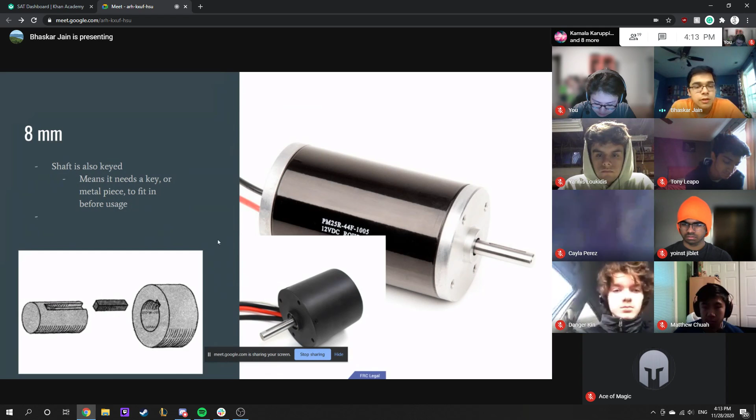So when we change output geometry, there's several things that we can change it to. What we usually use, and what you guys have used in your designs, is going to be 1/2 inch Thunderhex. So this is just a Vex website. If you guys are ever bored, you can scroll these websites too. So this is hex shaft. It's called hex because it's hexagonal. In the real world they don't use this that much, but it's very common in FRC.

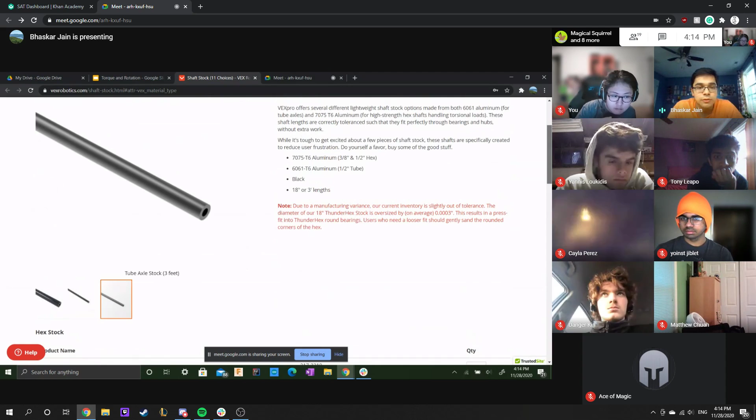Then there's round shaft. As its name implies, it's literally just a circle. The difference between 1/2 inch and 3/8 inch hex is just the diameter from tip to tip. You will not see 3/8 inch generally in FRC. In other robot competitions you might, but you'll generally see 1/2 inch. What we use here is Thunderhex, which is Vex's own special product. Unlike normal hex, which is a perfect hexagon, Thunderhex has these rounded edges. So you can use Thunderhex for both circular bearings and hex bearings. So actually, let's just show you guys.

Did your computer randomly just switch to like Yahoo, like the Bing search engine? I think you just have Bing as your search engine, Bhaskar. No, I don't though. I always change it. I think it's because of the safe search. Yeah, I think that might be it, but I thought I turned that off. Like, I'm 17 years old now.

I'm too cool. Anyways, so yeah, this is a circular bearing, and then we have a hex bearing. Just the differences for different shafts. So the cool thing about Thunderhex is because it has these rounded edges, it can work in both hex and circular. So we generally use Thunderhex, and the other benefit from using Thunderhex is that it has this hollow center. So that means we can thread it. Threading is a concept we'll go over a little later, but that's just one of the benefits.

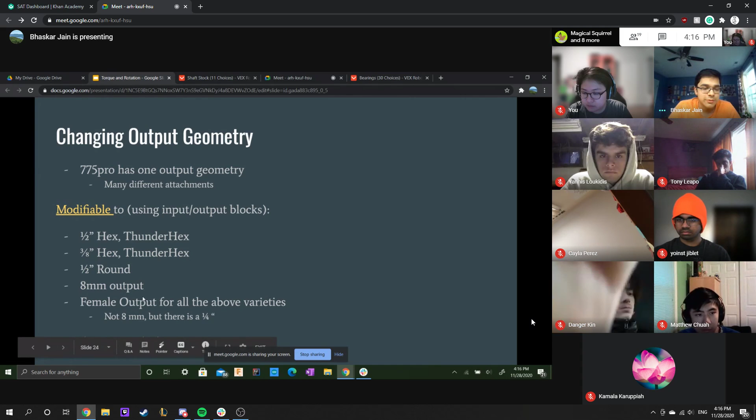So in addition to changing the torque and angular speed, these gearboxes are also really good for changing output geometry. Because like I said, these 8mm shafts aren't super useful on their own when everything else is like half-inch hex or something like that. Oh yeah, and for all the variations that I showed you, there's a female output shaft. This is basically the male version you could call it. There's just a female version for it, and we use those pretty frequently too.

So any questions or thoughts about output geometry? Those are the different types that are FRC legal. In general, we will be sticking to 1/2 inch Thunderhex. How do the female and the other types of shafts interact with each other? Why is there a separate female shaft?

So if this is the male output shaft, let's say I have a shaft that's 1/2 inch Thunderhex, and I want to connect it to a motor. I would put a female end attached to the motor so that the shaft couples with the female end. So you're just inserting the shaft into the female output part. Does that make sense? Okay, yeah, I think I get it.

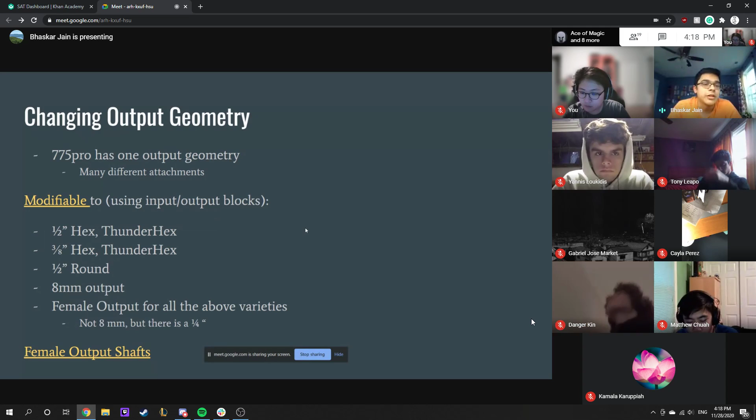Yeah. So any other questions about that? This is pretty important because up until now we've just been saying motor to a shaft, but this doesn't just connect to the shaft by itself. It has a little bit of engineering to it. So now we're going to talk a little bit about how VP works.

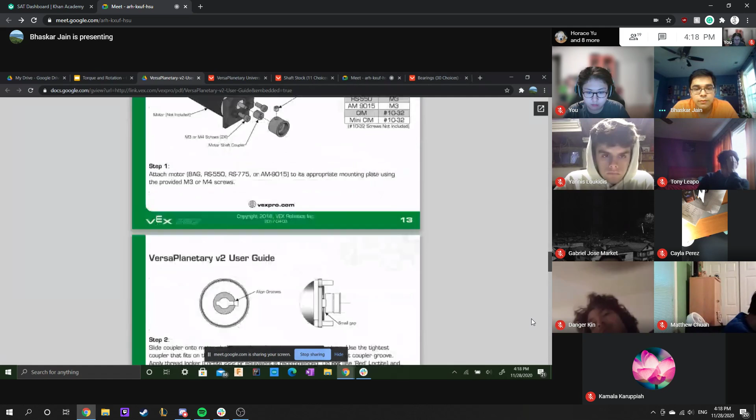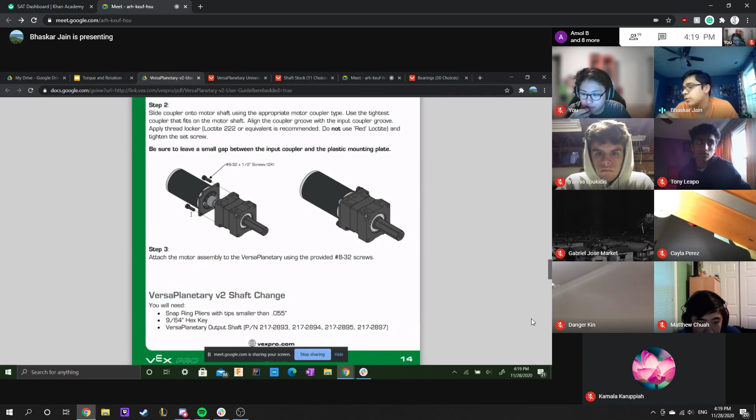Okay. So this is an example of a male output shaft. This looks like 1/2 inch Thunderhex. This is what it would look like attached to the gearbox. This would be another example of 1/2 inch Thunderhex. So the way a VP works, the way you attach it to a motor, the first step is you need this mounting plate. So let's say I have this VP.

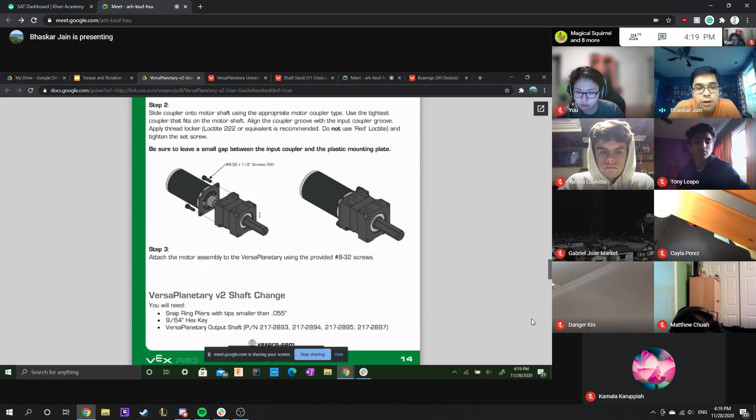The first step is to attach a mounting plate to it, which I have right here. You attach that via screws, and that mounting plate allows you to attach the rest of the gearbox to it. So the first stage over here, a better picture of it, this is the one that couples this 8mm shaft to the rest of the gearbox. This is called the base stage. It's pretty big and hefty.

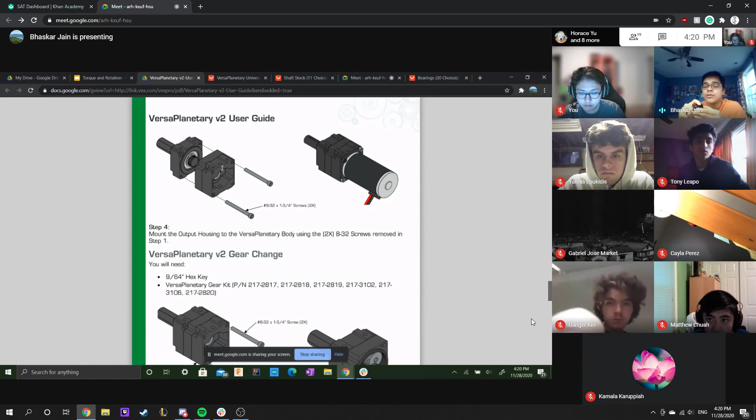So you take your motor, your motor mounting plate, and you attach it to your base stage, and then on the base stage everything else gets attached. So in this example above, you see that it has one reduction stage. You can have up to 3. 3 in general is your stopping point, because theoretically you can have as many reductions as you want, but there's physical constraints in the motor.

And then after the reduction stage, you attach your outputs. So a female output shaft, Thunderhex, whatever it is. Does that make a little more sense about how gearboxes work?

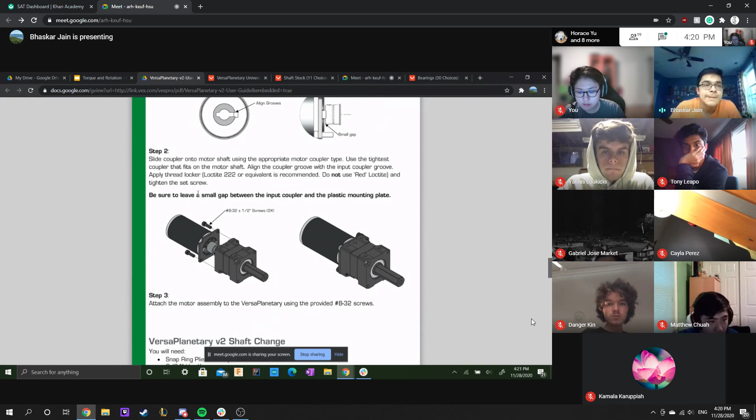Okay. And then once we have our motor and gearbox working in tip-top shape, we have to transfer that rotation somehow. So this should be a bit of a review because we already talked about this, but I just wanted to put it in words.

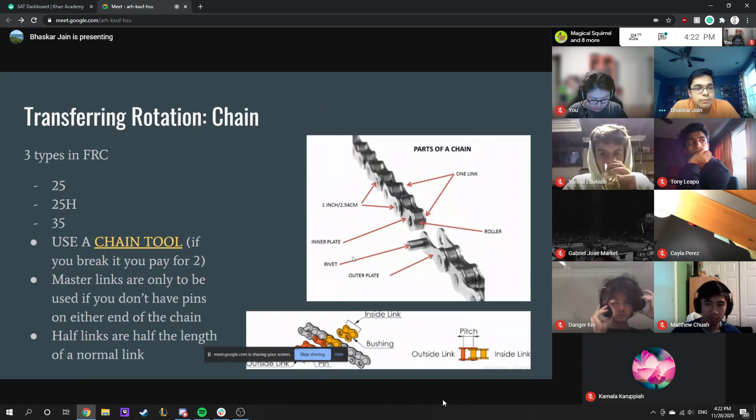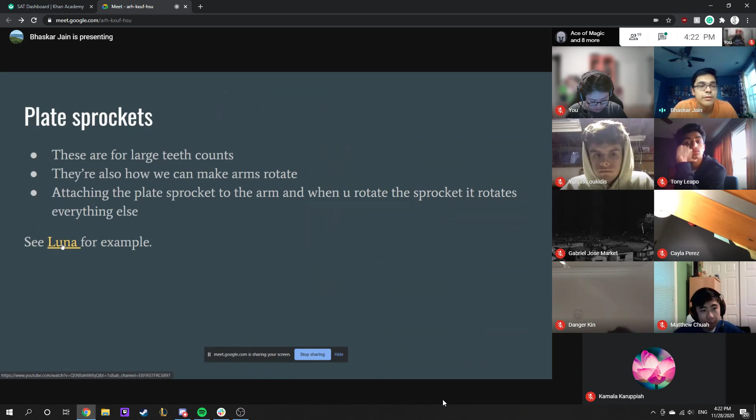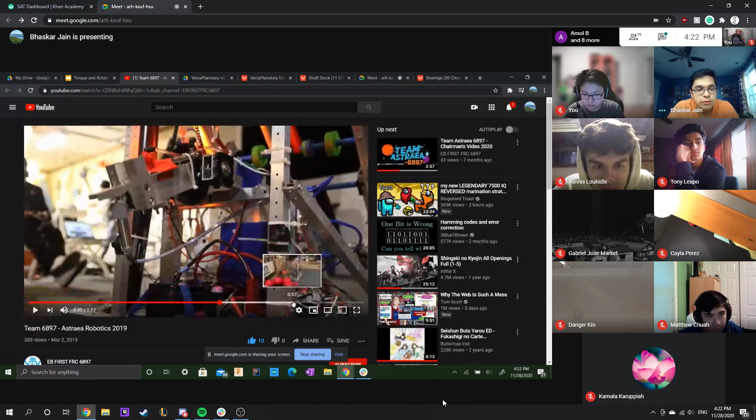Yeah, and then we have plate sprockets. I don't know if we touched on this last time, but basically plate sprockets are really large sprockets that we attach directly to arms and stuff. So if you go back to our Luna example, where was it? Okay.

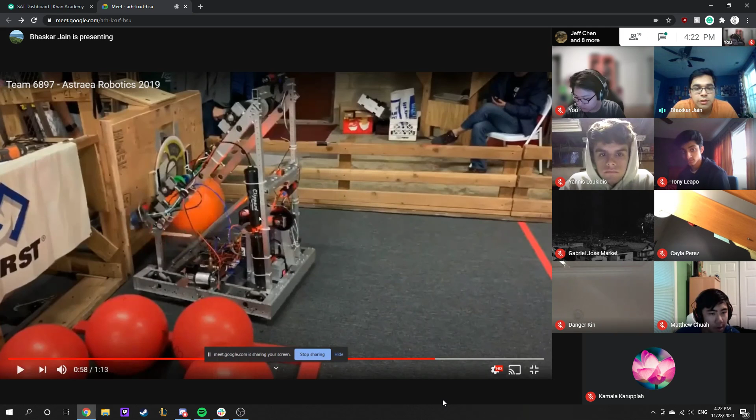This right here is your plate sprocket because it's attached directly on the shaft that your arm is rotating on, and it has a huge teeth count. There's not much to plate sprockets besides you generally use them for rotating your arms. This one, for example, has a 72 teeth count. Normally your sprockets that you're going to use are like 22 teeth-ish. But yeah.

If you guys remember, we talked about it earlier in the summer before we did hex hubs. I think we just kind of forgot about hex hubs, but you attach the plate sprockets onto the VersaHub itself, right? And then that lets you rotate an arm if you chain it with something else. If you guys remember that, I can try to find you a better picture if you're a little unsure. But yeah, we talked a little bit about it. Yeah.

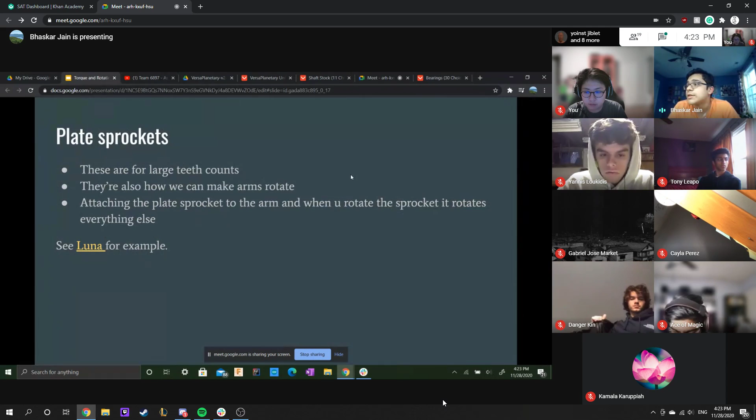So any questions about that? That's just letting you know that's there, because if you ever have a heavier arm, definitely go in the direction of a plate sprocket. That's definitely the way you want to go. So yeah, any questions about that? Yiannis will find you a link, hopefully, a little later.

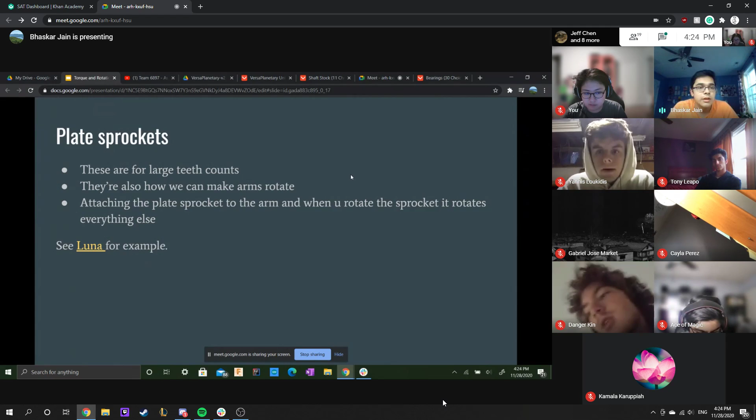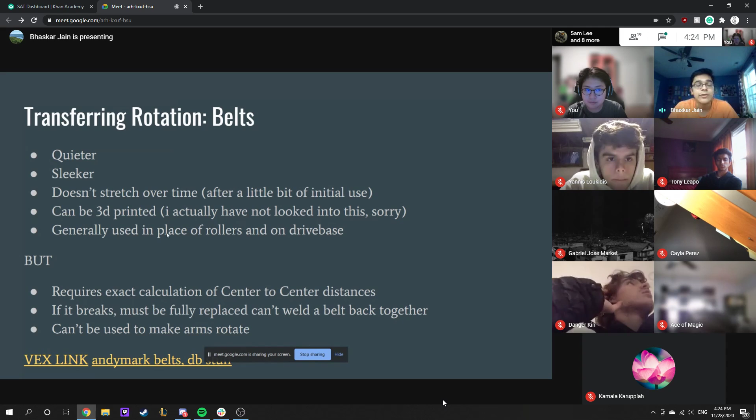Okay, and then we have belts. So in general, belts are quieter and sleeker than chain, and they're better over time because they won't stretch after the initial bit of use. But the cons of having the belt in place is that you need very specific measurements, like for a drive base, for example.

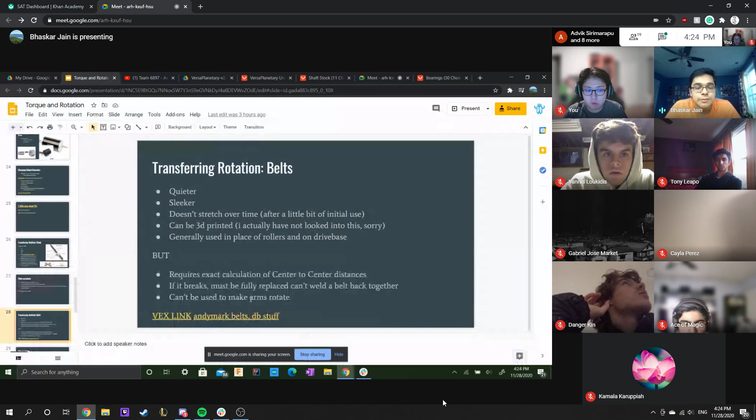Sorry, the link didn't work. Did I just mistype something? Bro. Alright. For the drive base, what the heck? It's 14U4. Oh, did I type in 14 again? Might be. Thanks, Matt. So for the drive base, right? When you attach belts to it, what the heck? What is this? What is this?

So when we attach belts to the drive base, these measurements are super specific. When they machine these, they're very specific measurements. So when you attach a belt to them, it's not a problem because they've already figured everything out. But for our purposes, when we're going to design a robot or something completely new, like one of our mechanisms, we're very likely not going to be able to get that precision. That's why we're not going to use belts for that type of stuff.

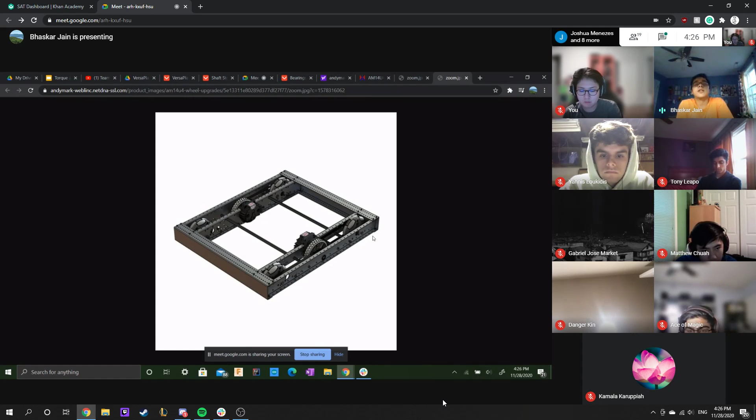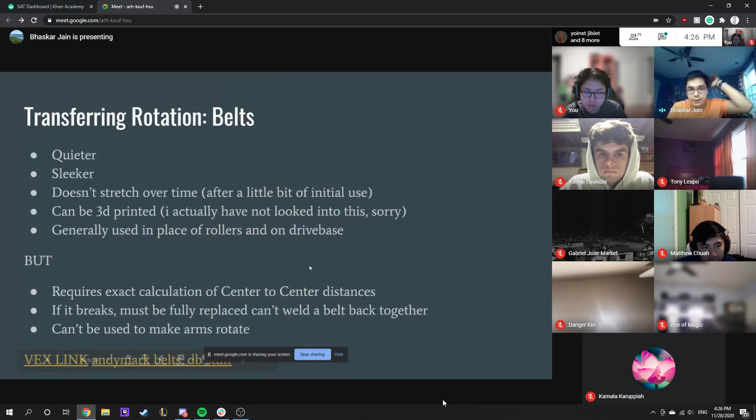We will use belts, if you remember when we talked about dead zones, when we're moving stuff inside the robot so that we don't have any more dead zones. But yeah. Any questions about belts and stuff? Oh yeah, and it can also be used to replace a roller, like I said, for dead zones. And a roller is literally just what you would imagine. Just a roller.

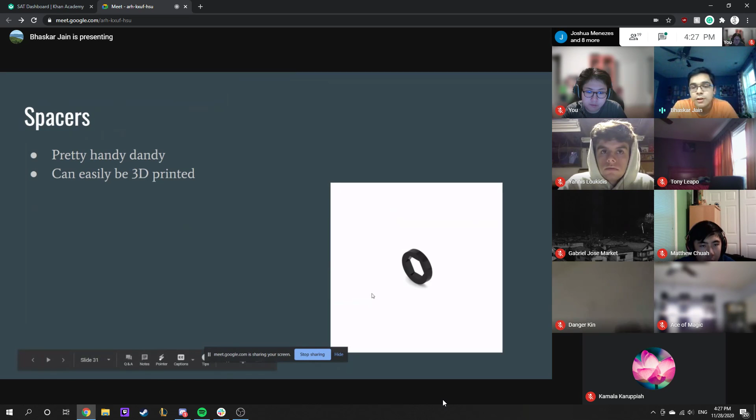And then this should be another quick review. Spacers and shaft collars are just the two ways you would retain stuff on a shaft. So spacers is what they would look like. You can make these as long as you want. And then shaft collars, you guys know what this looks like. It's retained on the shaft. There is a third type, which is bolt and washer, and I want to talk about tapping before we go into that.

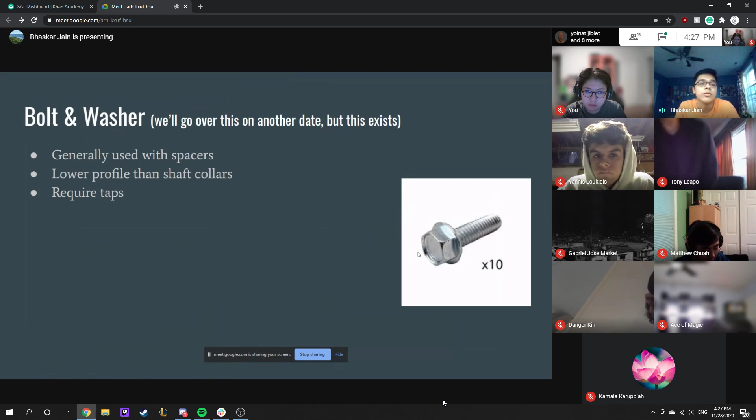Okay. That's all I had for today. It was just a quick finalizing of gearbox and some rotation stuff. Do you guys have any questions about what I just talked about? Yeah, you're good.